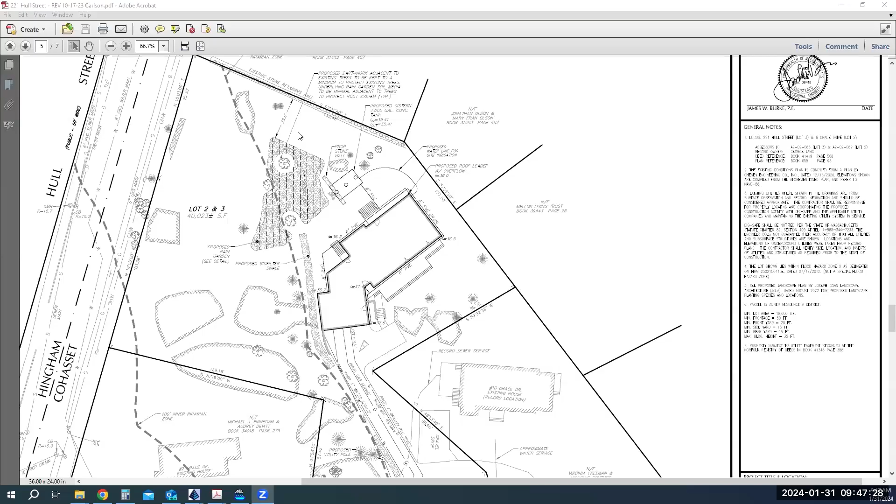Yes. So we originally designed it for - this is the proposed E-One, this is where the one for 10 Grace Drive is. So we can move it up in the vicinity of the house, and then just be a pressure pipe coming down the driveway instead of the 4-inch gravity line.

You sure that's the pump though, in that cover there? I haven't personally opened it, but I don't know why there would be a manhole there. It could be for the check valve or isolation gate. The original location we had listed was basically underneath their porch. The porch was built. I haven't been out to this site - it was our surveyors who went out and did it. I'm not sure if they opened it or not. I don't see any control panel locally mounted either, so I'm kind of questioning whether or not that is the pump.

So yeah, we can revise it so that the pump most likely ends up being somewhere in this vicinity, and then it'll have the pressure pipe come down the driveway, which would make it easier basically to traverse those other utilities, you know?

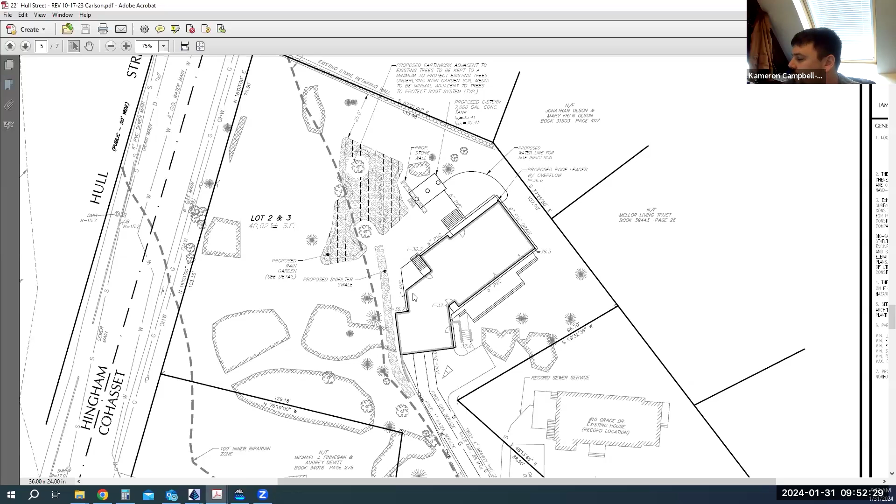Like I said, we got the comments yesterday, so we haven't had a chance to really dive into them or start the revisions. After looking at them, there's really no issue with any of the comments, and we don't see a problem with being able to revise them.

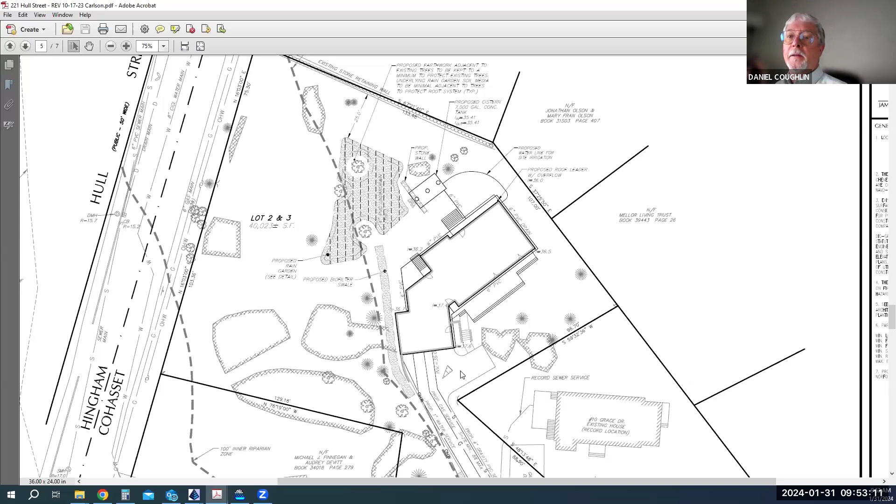The only concern I had is during construction, if there was a high ledge lot, we allowed 3-foot burials with pre-insulated piping. So I'm not sure if this installation has that, but if it's only 3 feet of cover and you start putting heavy equipment over it, it may be an issue. So I'd recommend at least test pitting the area to find it and see what you have, and maybe put plates over it until you have a roadway.

I know there's a driveway at the opening, there's already part of a driveway there. It just extends back up, because the way this site was, they cut off this extra lot from 10 Grace Drive, but when they cut it off, they didn't pay attention to where 10 Grace Drive's utilities were. So essentially their utilities are on our lot.

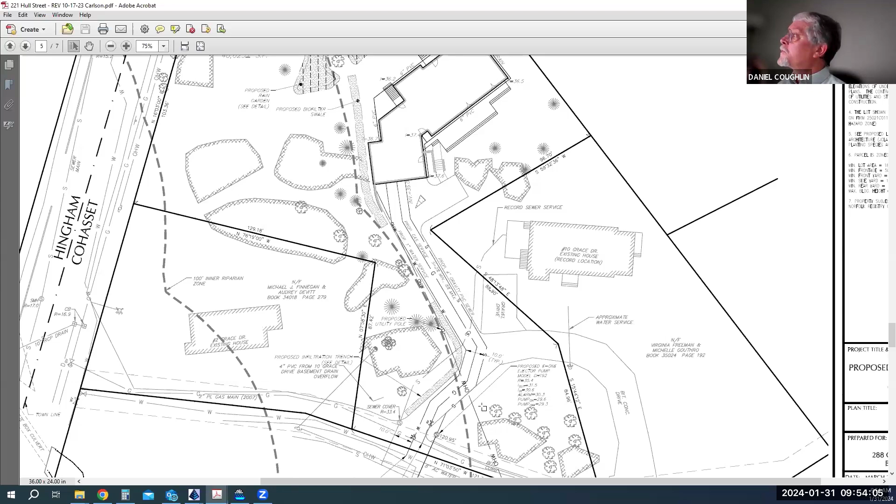Which means you still have to protect them, I guess. Yeah, exactly. I was just concerned because you had a phase plan - I think it was the one you labeled as construction management. You obviously have access to the rear of the lot, and you had a dumpster very close to the other side of the sewer, but no driveway yet, or no roadway proposed.

Basically you were going to be taking heavy equipment over the grassed area, and our concern was that material wasn't going to have sufficient bearing to protect that pipe. So we can look into it, and if it's required to sleeve it or whatnot, we'll propose it and show it on the construction management plan.

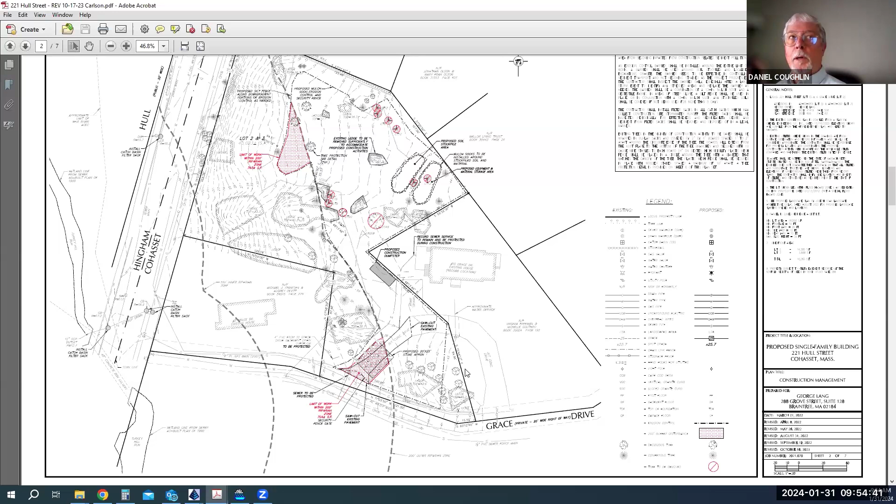One final question - I know you had 3 different references to the E-One pumps. Do you know which one you're using? I don't specifically, it's the one on the plan that we show.

So the issue is, I think the DH-152 is what we were proposing. The 192, I think, is a typo on the plan. And then the homeowner sent in the application, so I don't know if he talked to someone and they suggested using that one. We'll have to check with him and see what his plan was.

It doesn't matter much, it's just that the 2-pump scenarios are also obviously overkill for the installation, and the larger chamber tends to accumulate more grease and be more problematic if it's not getting regular use.

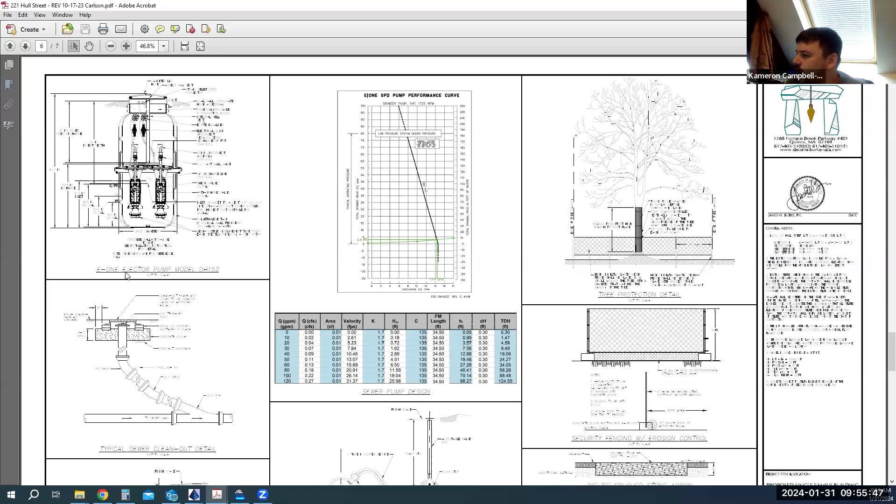The application looked right and these looked wrong, but just let us know. I would assume he talked to the manufacturer and that's the one they suggested. Also looking at all the ledge you have out here, they also have a ledge tank or a squat tank - that might be desirable too.

Do you have any other questions on the comments at all? Not specifically - our big question was the location of the E-One, where you guys would like it, and we got that answered.

We'll work on the revisions and get them over to you as soon as we get them done. And just from an administrative perspective, we need to know if there's an easement or right of way on the property or not.

There isn't one at the moment. There were talks of giving one to 10 Grace Drive because of their sewers on our property, but we don't have an easement to access this property. We have the frontage on Grace Drive and on Hull Street. Right, they just subdivided it off without looking where their sewer went.

Brian had some questions about that aspect of it, so we want to get that clarified. I know they were fighting it and there was conversations regarding it, but I'm not sure what the outcome was. Okay, we can look into it and let you guys know. I'd like Carol to maybe look into it too.

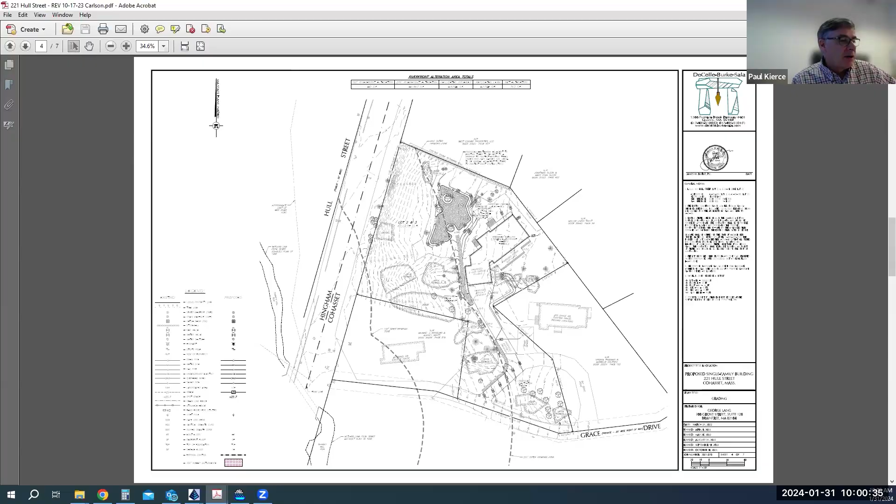Wayne, the question I had for you is if we want to have another sewer meeting in February, do we want to have it 2 weeks from now, which would be the 14th or 15th, Wednesday or Thursday? Certainly, wait until the 21st and 22nd. That's fine. 14, 15, sure. Okay, yes. Wednesday is Valentine's Day, Ash Wednesday, and whatever else Wednesday.

So if Wednesday morning works, we can, because we had the folks from BlackRock that wanted to come before the board, and there's history with that area, so I wanted to make sure you're available for that. Yes. So Wednesday the 14th, that would be at 9:30 a.m. Okay, we also have a meeting Friday, correct?

Yes. Now, there is a project that I became aware of that is beginning to go through the system, for Lambert's Lane, a 6-lot subdivision, and it looks very complicated. But those plans, I think, are starting to go through.

Apparently the applicant already has permission from the town of Hingham to make the connection, but when I look at it, it's going to be interesting. So, that whole area, everyone over there has grinder pumps, right? They're tearing down one house to put another house in, and in the end, I don't know how they got the subdivision plan done. It's going to be coming up, so something else to look at.